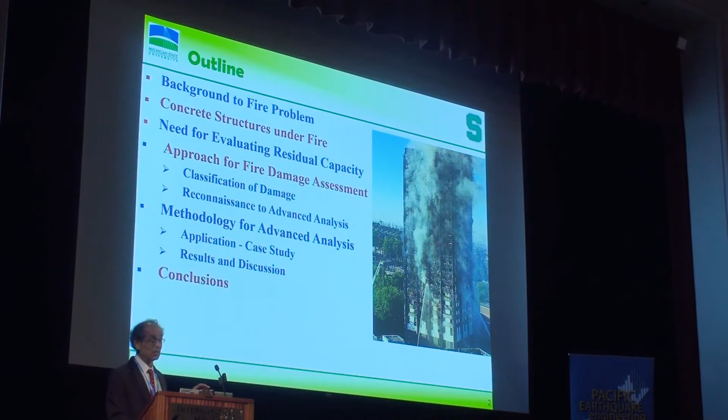And what is the need for evaluating the residual capacity? Then I'll present a classification of damage which can be done through basic reconnaissance, up to advanced analysis, to classify fire-damaged structures, which is very important, and there is a lack of guidelines or standardization for this. Then I'll present a methodology we are developing as part of the PhD work recently and advancing it. And if possible, I want to present a case study, but let's see.

Fire represents a severe hazard and threat to the built environment, as I already said. These fires cause thousands of deaths and billions of dollars of damage every year in every country around the world. If you look at the statistics for the United States, there were more than 1.32 million fires in 2017, ranging from very small to very large, causing 3,400 fire deaths and resulting in $23 billion of losses.

And if you include indirect losses, it adds up to more than $50 billion. In any country around the world, fire damage or fire losses amount to 1 to 2% of the GDP every year. Just to give you some statistics.

Good thing about this also I would like to add, many of the fires don't lead to collapse of structures, collapse of the damage, and even, it is put out very easily. But there are a good number of fires which do cause damage and destruction.

Now, fire is an important hazard. Why? Because fire can start due to an electric short circuit in any one room. There are so many electric outlets, it can start from there. It can start in a kitchen, for example, or somebody throws something, luckily smoking is banned in most public places now. Before that, most of the problem in the United States till the 80s was smoking, a cigar falling on a carpet and starting a fire.

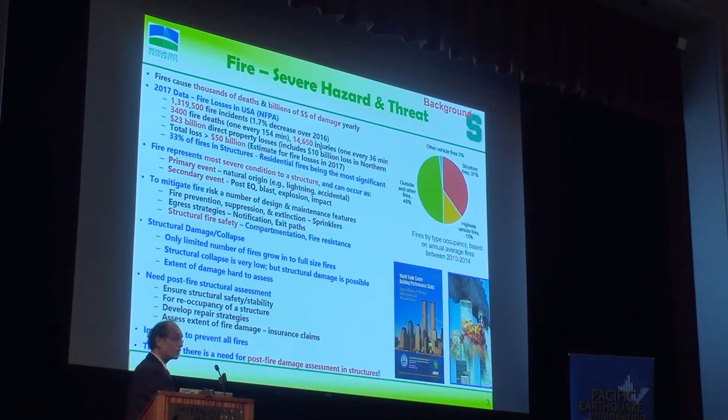So as a secondary event, after an earthquake, after a blast, a truck hits a bridge - you are designing that bridge to resist that impact load, but forget about the fire. Including in 9/11, much of the damage was done by fires, not by the planes hitting the building.

In fact, the conclusion - I was part of the investigation team on September 12th, we were at ground zero - the conclusion of this report which went to Congress was that the towers would have been standing today if there was not that kind of fire, or if there was no severe fires.

Okay, so fire as a secondary event will be the primary cause of damage. Now it can happen even, you might laugh at this, after a flooding - where more than 1,800 homes were burnt down after Hurricane Sandy.

In New Jersey, an electric short circuit in one basement led to damage where each house was $1 million plus or $2 million, affecting 1,800 homes. So you can imagine the damage.

Now, to mitigate this, we put in a lot of measures. One good reason you don't see fire leading into collapse is because of these measures. Fire prevention, we try to prevent by making electric short circuits much safer. Then we put in sprinklers, heat detectors, smoke detectors, exit paths, a number of them. And the last one is called structural fire safety. That means a building has to stand up for 2, 3, or 4 hours in case of a fire, so that the fire can be put out and the building can return to normalcy.

Now, this structural fire safety is based on prescriptive approaches. As mentioned yesterday, most building design is based on codes 100 years old or more, so it's not engineered at all, unlike other events.

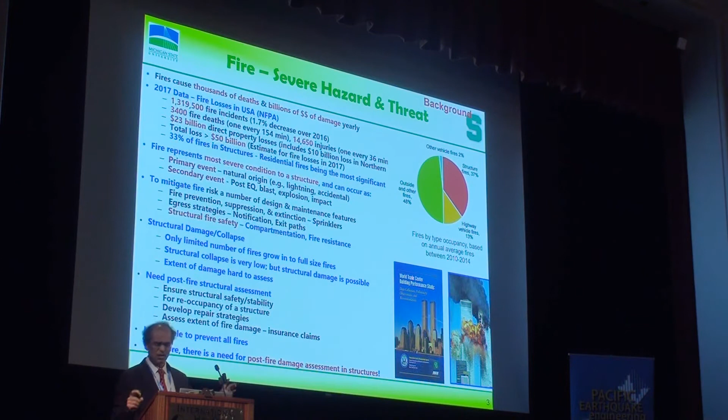Okay, so look at the high-rise fires in buildings. I'm just pointing this out to illustrate the magnitude of the fire problem. Starting from 9/11, where more than 40 buildings suffered damage and destruction. Out of this, about 9 buildings collapsed, 18 buildings suffered damage, and much of it is due to fire. Things have not improved since then, though there are very limited changes in the codes.

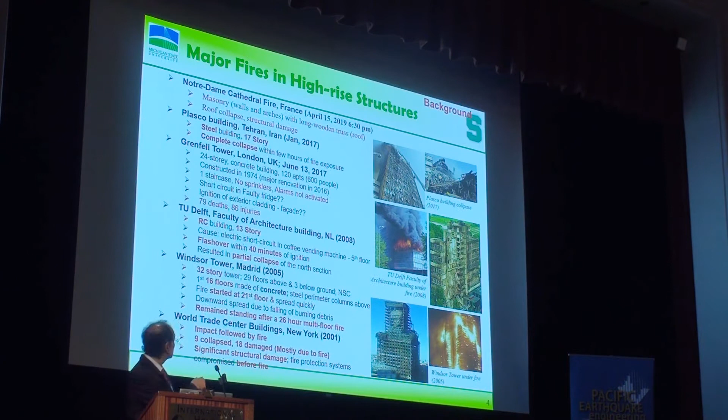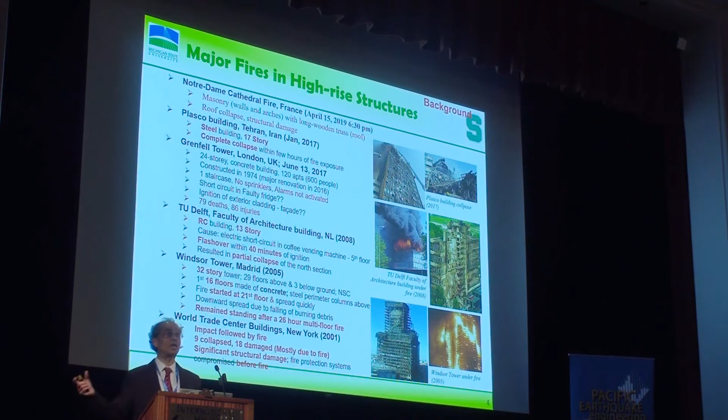TU Delft, for example—I was part of this investigation with the Technical University of Delft Reconnaissance team—a short circuit in a coffee vending machine led into a fire. This 13-story architectural building collapsed. Right after that, one of the biggest problems was whether to get into the building or not, to assess the damage, for a number of days. No techniques, no technologies, right?

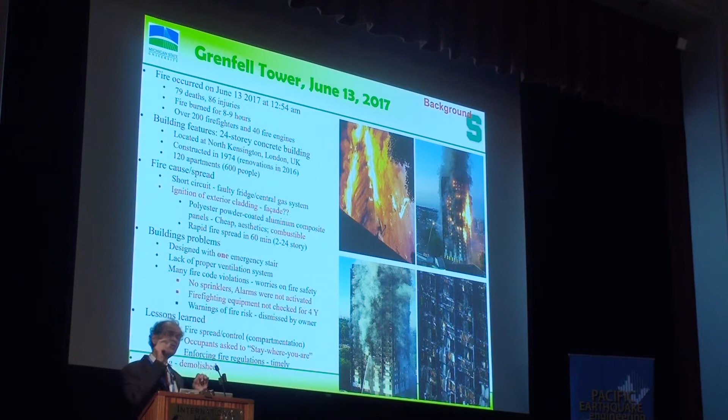So then let me talk about Grenfell Tower. This happened in Paris as well, but for lack of time I will focus on Grenfell Tower. A lack of wiring, or faulty wiring, in a fridge led into a huge fire. And because of the combustible materials of the cladding outside, fire spread very rapidly, never seen that kind of fire before. With this number of people there, fire definitely affects much more the people who are poor, vulnerable, or aged, because they cannot run away fast. In this building there were a lot of refugees and others, I think, and those people had a lack of understanding, including language problems, to get out of the building.

When they were trapped, firefighting happened, but it could not be controlled. The firefighters then withdrew. They couldn't get back into the building after 2 or 3 days, because they never thought the building was safe. And structural engineers couldn't do much to assess the damage. Because of this, it took 3 days even to recover the bodies, or to get into the building in case somebody was there to save them. So this is how it turned out.

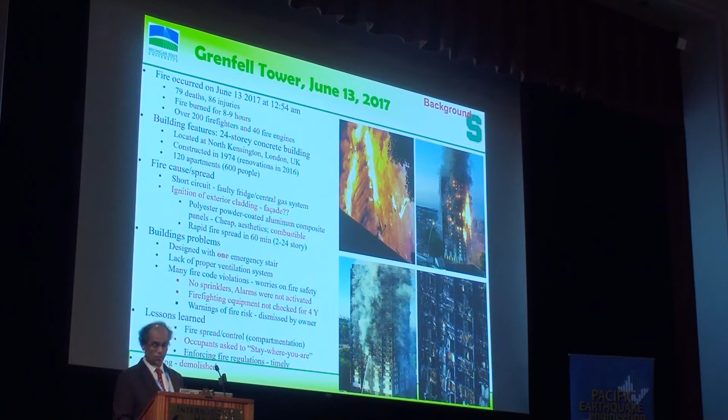Now, it is not buildings alone. In the case of bridges, it's worse, because that's the most critical infrastructure you need. Why? In the case of buildings, we put in a lot of measures to at least get the fire problem under control, like sprinklers and heat detectors. For bridges, you don't do anything—they're not designed for fire at all, no prescriptive approaches even. Today in the US, you don't need any measures for a bridge to be built from the fire perspective, whereas in buildings you need to do that, right?

Building codes are very specific. So when you look at this number, including the MacArthur Maze, you all know it happened right next door here in the Oakland area. In this case, a steel girder bridge collapsed in 17 minutes.

It's a textbook kind of failure. I teach a course and tell my students steel structures can collapse in 20 minutes without any fire protection. Here it happened in 17 minutes because it was an oil fire. I teach building fires.

So in this case, you see what happened, and how much loss to the economy. It took weeks or months to rebuild this bridge. Silicon Valley people were asked not to come to work for the next few months.

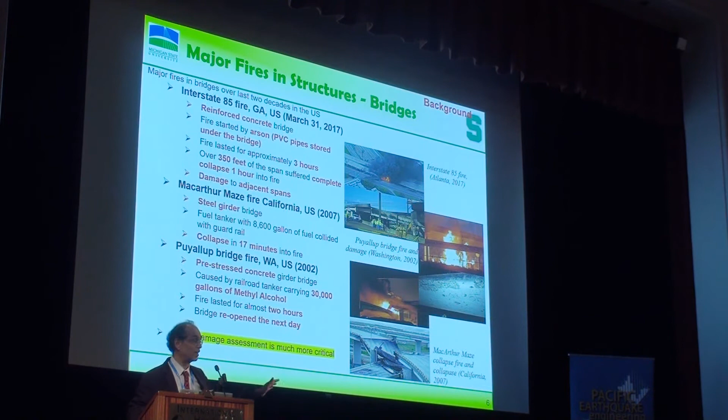Now let me tell you if concrete bridges are better. This is an example that happened outside of, or close to, Atlanta Airport, on I-85. What happened was there was a problem with the drainage.

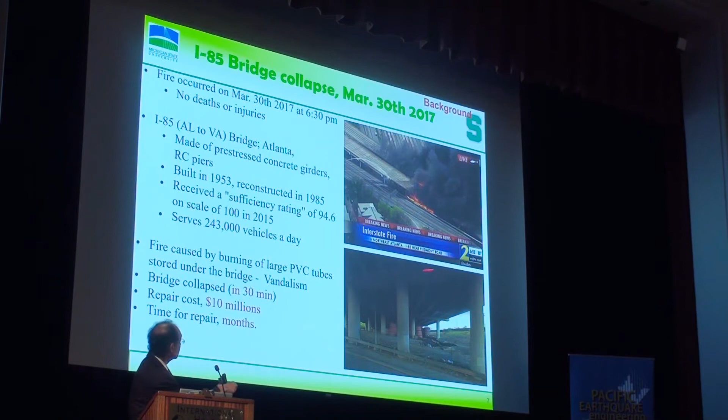So they decided to bring in a lot of pipes, which were basically polyvinyl chloride pipes, so that in the spring they could start the work. On a March evening, when it was very cold, a homeless person comes in—that's at least alleged—and puts a lot of papers and rubble around to start a fire to warm himself up, and it spreads, and he runs away.

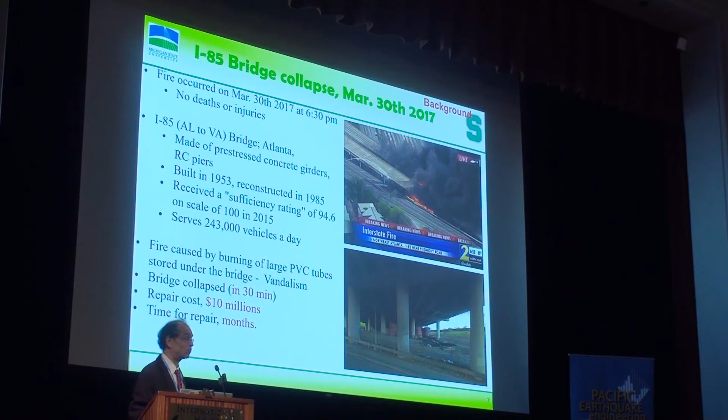Then when the fire department comes in, they start to fight the fire, because it was on a highway close to Atlanta, so they could respond. But what happens right next door? Look, they couldn't fight the fire because of the new kind of materials and new kind of constructions, where we are increasing all these durability characteristics and concrete strengths.

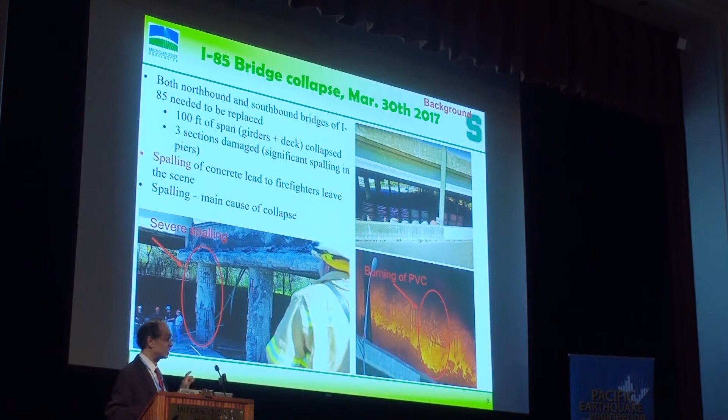Today my students are making 35 KSI, 200 megapascal, even 220 megapascal concrete—it explodes under fire. That's a different topic for some other day.

Steel is not immune either; new types of steel have problems too. Wood is much more of a problem. Any new material you tell me has lower fire resistance than what traditional materials used to have, including masonry.

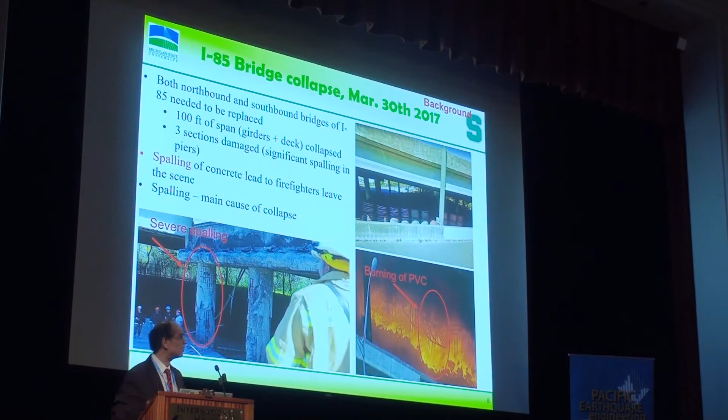So anyway, look at this, what happens. Huge fire, firefighting could not happen, lot of spalling. Can you see that the reinforced concrete is completely exposed?

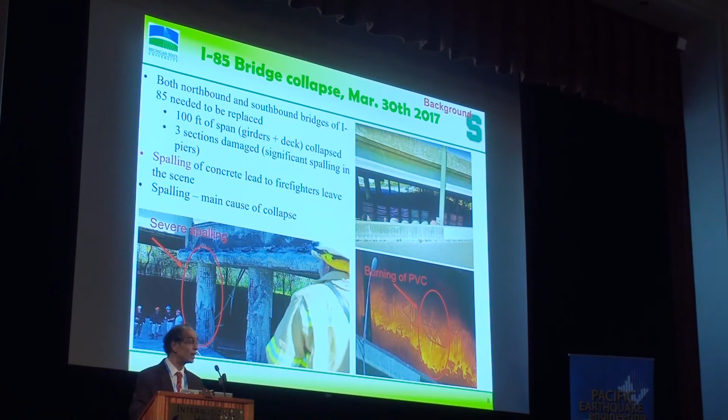The problem was not that multiple spans happened—a few spans collapsed. They didn't know which to replace, which to rebuild, because it takes a lot of work to take the core and test it and so on. So there aren't really many methods for that.

How are we doing right now? So right now, concrete structures typically have excellent fire resistance, and in most cases they recover much of the capacity—much of the residual capacity is there in the concrete structures.

Typically, we don't have to do anything in concrete structures from a fire design standpoint. All we need to do is provide concrete cover to the reinforcement and maintain minimum member dimensions. That's the current code. And with temperature, the strength and stiffness drops.

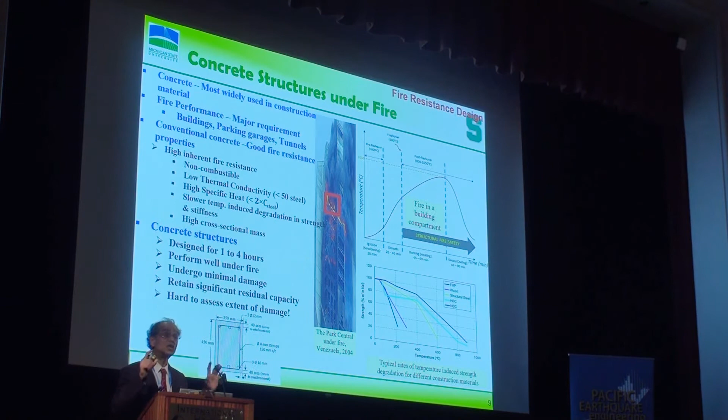This is concrete, that's steel, this is wood. So concrete typically loses strength much slower than other materials. That's the property which gives it much better fire resistance, so our residual capacity is left.

If you look at the 9/11 buildings, this is World Trade Center 7. After 8 hours of intermittent burning, it collapses. It was designed for a 3-hour prescriptive approach.

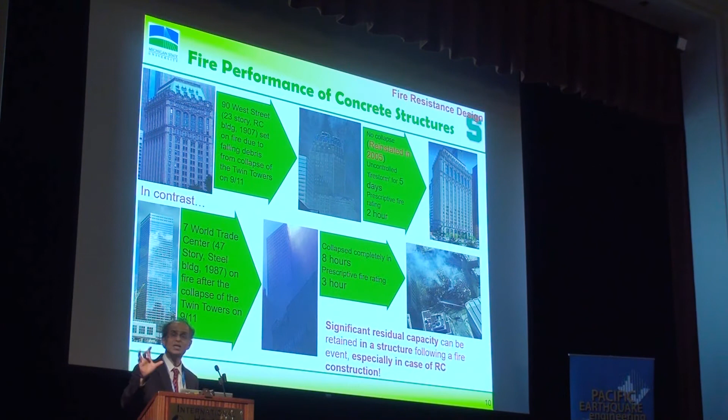Look at the concrete building 90 West Street—it burned for 5 days intermittently, was also designed for 2 hours, but it could be retrofitted. This one collapsed, that one could be retrofitted. So the message is: concrete structures can retain significant amount of capacity.

As I mentioned, it's very important to assess residual capacity after a fire incident, because the first thing is whether you want to send people back into that building, like apartments, because otherwise a building might collapse. It happened in Sweden—there was a parking garage.

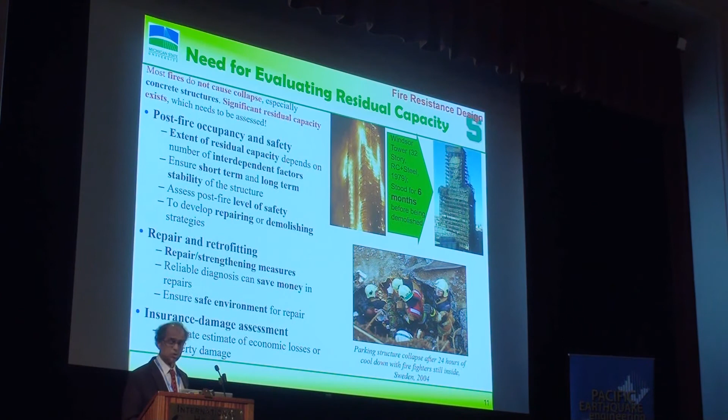After nearly 24 hours, people went back, as firefighters went back to the parking garage, the building collapsed on them. Because the cooling phase in a lot of fires, especially in post-tensioned structures, is much more dangerous than during the fire itself. So now it's not only about what kind of repair and how much capacity has to be restored—you need to do calculations to find the residual capacity, as well as for insurance and damage assessment, from the state agency's or insurance company's point of view. It's very important.

What is the current state of the art?

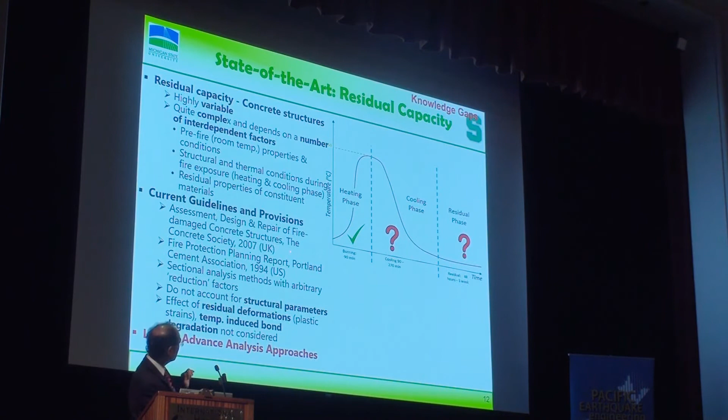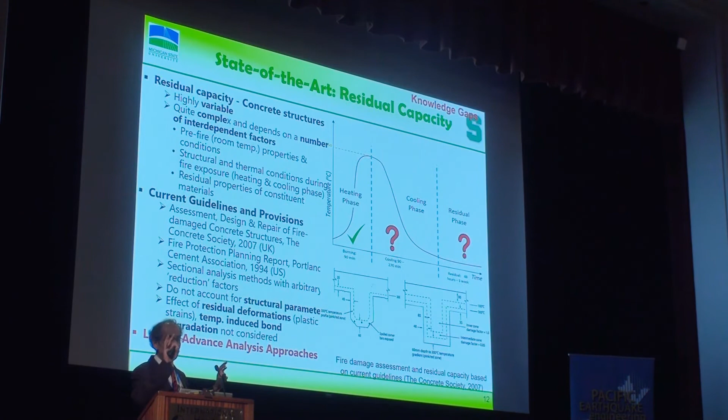Information on this topic is very, very limited. There are some prescriptive guidelines, such as the UK Concrete Society recommendations and some books, but there is very limited information on how to assess damage. American codes don't have any information on this, including the new ACI repair code when it comes to fire damage. So why is it so bad?

Because of the complexity and also the limited research going on in this field. So what happens if there is a building under fire? Take this beam, where there's fire in this compartment - during the heating phase, this is how fire starts and it cools down. The temperatures within that concrete beam or member - this is rebar temperature, this is concrete at mid-depth.

Now look at the structural deformations. A lot of damage is happening in the structure, but it's recovering, and at each minute various properties in the concrete microstructure and steel are changing. That has to be accounted for in the analysis, and finally you end up here after complete cool down of the structure, which takes a day, 2 or 3 days.

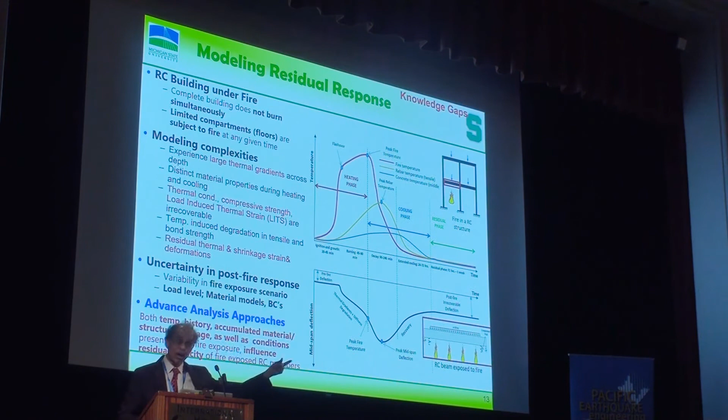Look at this - these are the residual deformations, which have an impact on the residual capacity. There is, as I said, very limited information in the current codes and standards, so we came out with a classification system.

If there is a fire in a building, bridge, anywhere, you can classify the structure - overall structure or structural members - into 5 levels of damage. Class A: very limited or no damage at all, cosmetic damage, just the paint is gone or something. Class B: technical damage, very small cracks and stuff.

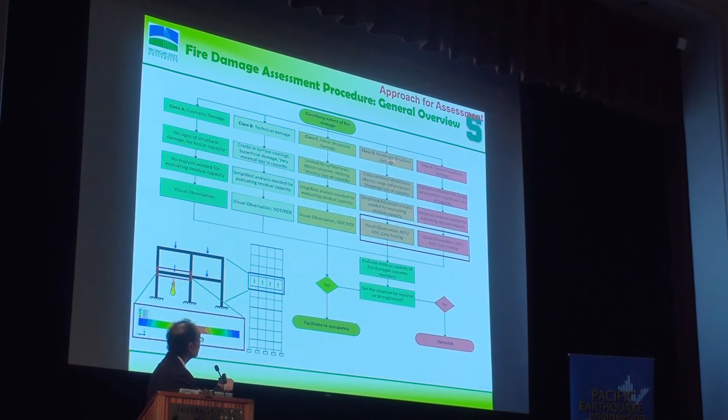Minor structural damage - yes, there may be some loss of capacity. Then some level of capacity loss and significant level of capacity loss. That's class A to class C.

Then we came out here - no analysis needed, just some reconnaissance. Based on the first visit, reconnaissance is needed everywhere. Then you move on to simplified analysis, just to fix those cracks or whatever. Here you can apply simplified analysis with some non-destructive testing. Here, some semi-destructive testing. Here you need advanced analysis together with NDE or NDT methods.

Then you decide whether to facilitate reoccupancy or demolish. In most cases here, there's a chance you may have to demolish, but in these cases you can retrofit very quickly and easily, whether it's a bridge or a building.

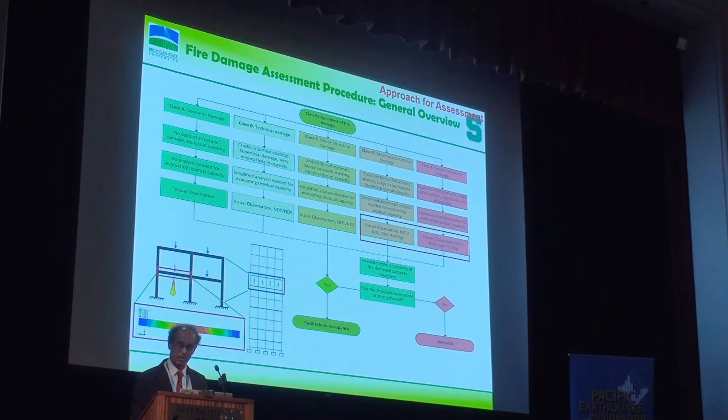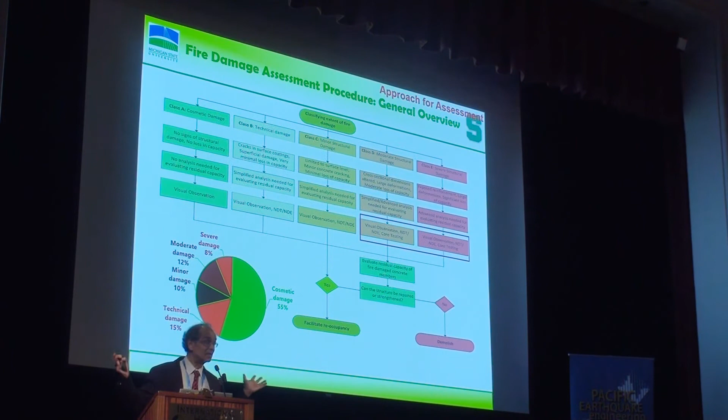As you can see here, in fires, only severe damage happens 8% of the time. But some statistics show that after reconnaissance in over 55% of the cases, you can say there is not much you can do, or there is not much damage to the structure - but you need to look at it carefully.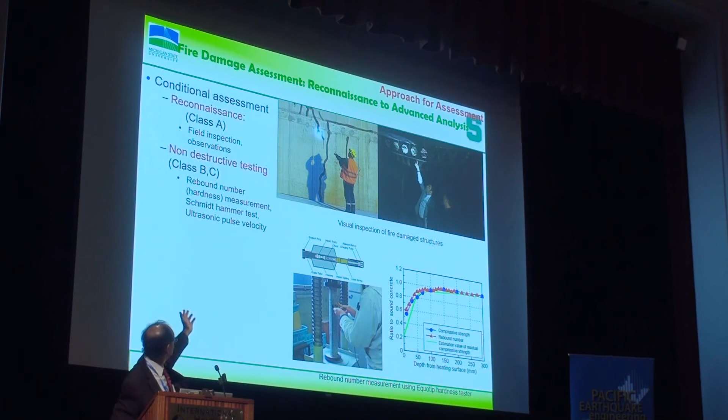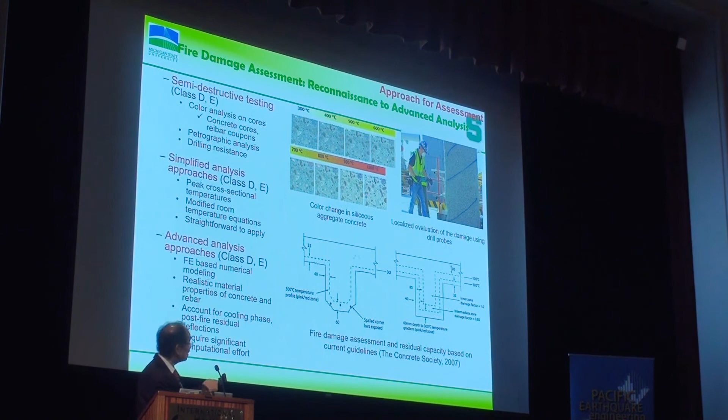Non-destructive testing - you can do this with Schmidt hammer and other kinds of tests. There is some information from semi-destructive testing, and you can apply some empirical approaches such as simplified analysis when the damage is class D. But for class E, you have to carry out advanced analysis.

Now, even in the same building, you can have various classes of damage depending on where you are in the building. Some parts may be class A damage, others class C damage. So this has to be determined from the first reconnaissance, then go deeper into this. Reconnaissance is the most important step.

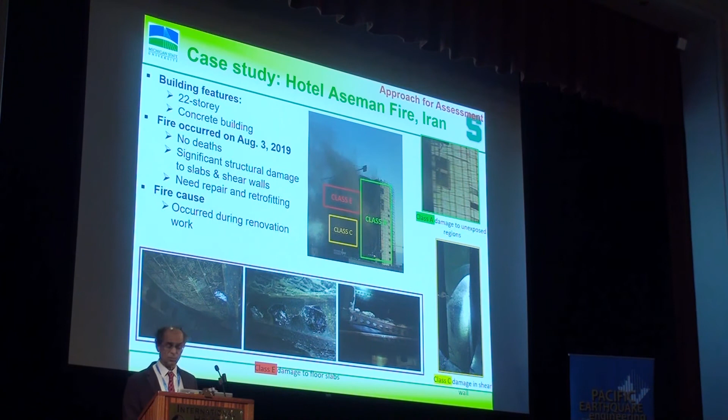Now, for advanced analysis, let me get directly into the approach we developed recently. I'll show you quickly because of lack of time. You need 3 stages of analysis.

You need to know just before the fire what the structure was, because a structure might be designed for overcapacity, which we always do, but what was the condition just before the fire started. Then the second stage of the analysis is during the fire - what happens.

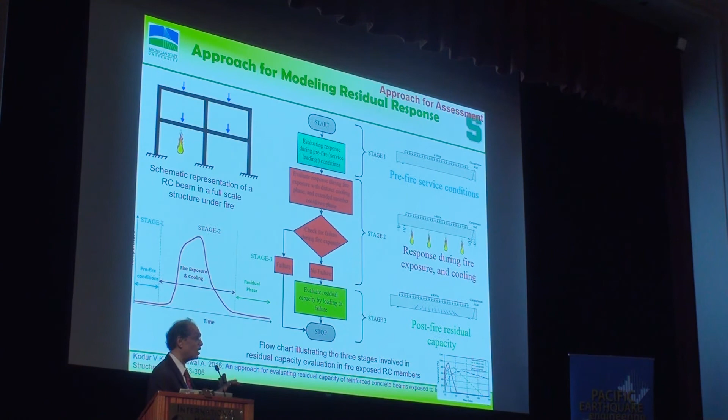Especially the complication is during the fire heating phase and cooling phase, where the properties, your boundary conditions, everything are changing with time - boundary conditions especially are very important. And the third stage is just after the fire, after 2 or 3 days, what's the capacity. So 3 stages, which in the literature nobody talks about.

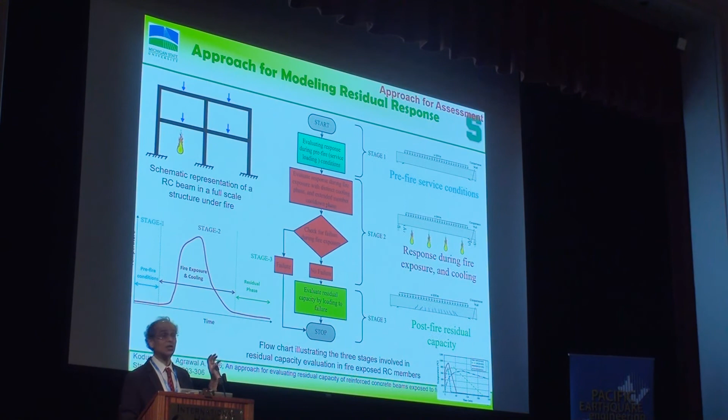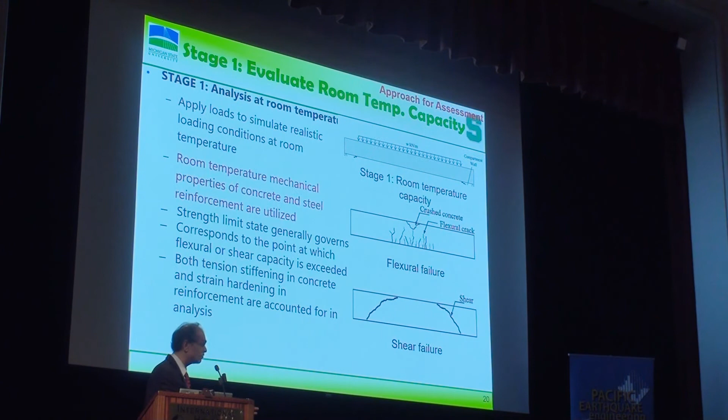So this is a new approach we developed, and the problem is at each stage of the analysis, the material properties are different, boundary conditions are different, failure limit states are different, remember. So that has to be given due consideration.

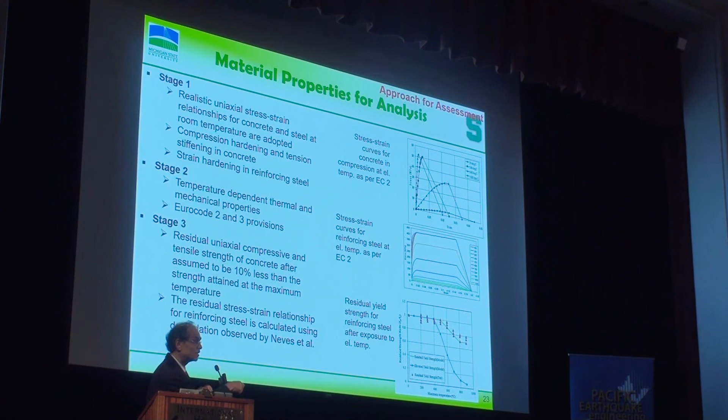Once you do this, for concrete, look at this: during elevated temperature, in the heating phase, the stress strain curve is decreasing like this. For steel, it's decreasing at 800 degrees here, 20 degrees here, but steel recovers much of its strength, whereas concrete doesn't, during the cooling phase. This is the yield strength or compressive strength. Concrete doesn't recover during the cooling phase, but steel recovers much of it. So all this is very complicated from that point of view.

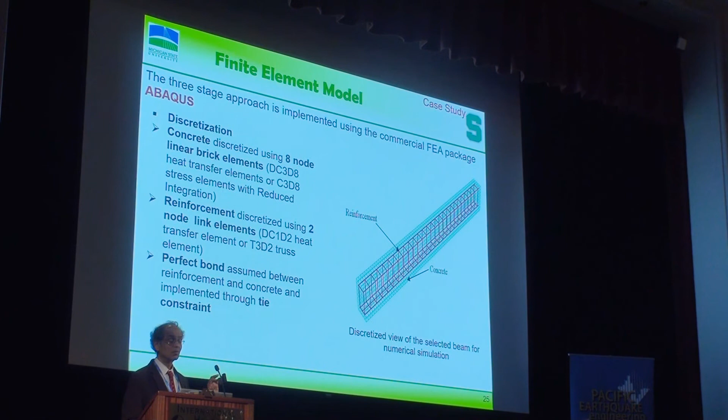You can apply finite element models, which I'm not going to go into. I'm going to show you a simple case study kind of stuff.

So this is a beam. A fire happens in a tall building. There are two beams, one in one compartment, another in another compartment. Based on the firefighter reports, based on the reconnaissance, we know that there is damage to the beam, class C or class D. So this is the first fire. I can create the fire in the room if you tell me what the contents of the room are, whether it's an office room or a hospital room.

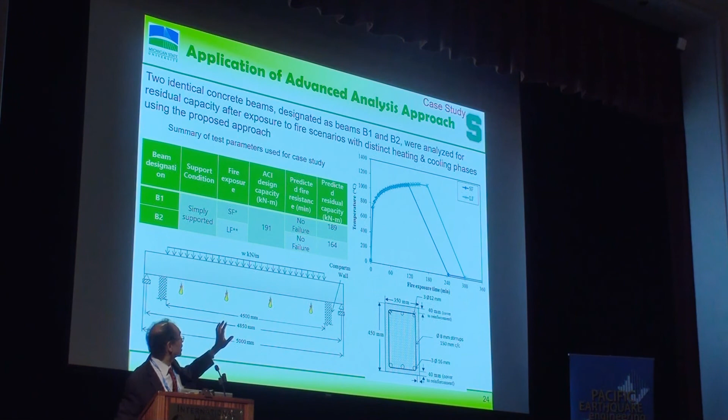This is a long fire. In another compartment, there is a lot of books and stuff, so that's where you have significant fire, a longer fire. So if it is, then I do the analysis, first step, second step and third step. Let me go to the second step.

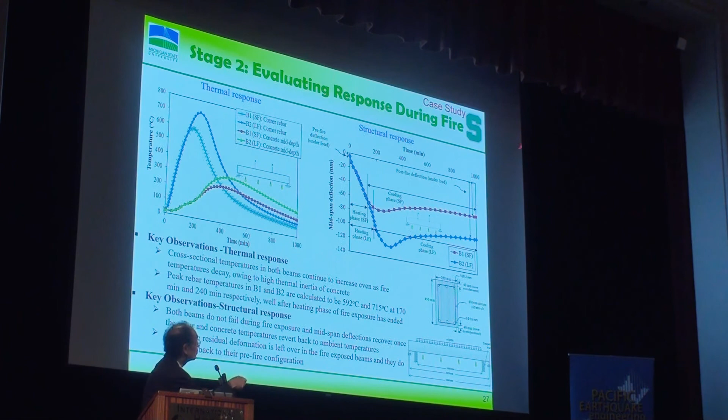So this is the capacity left, this is the residual deflection. You need to impose these deflections to evaluate the moment capacity of the beam. So this is under the long fire, this is under the short fire.

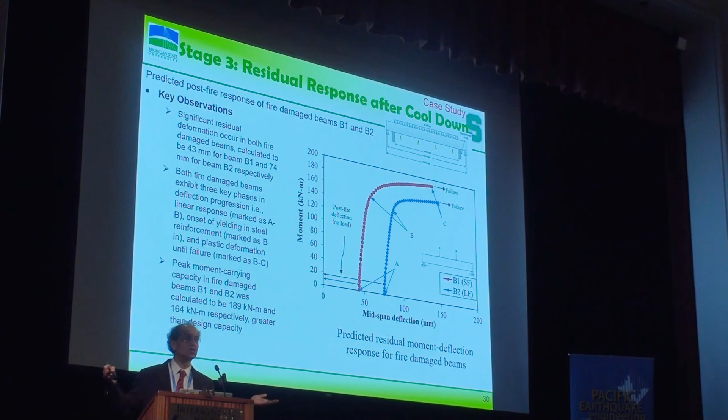If you do a series of calculations, it's possible to apply this if there is a bridge under fire. Typically, in the design office, you can do this if you know all the properties of the bridge, and all the relations and variations in material properties and others. So a number of factors affect this, and it has to be given due consideration, including, as I said, different fire scenarios.

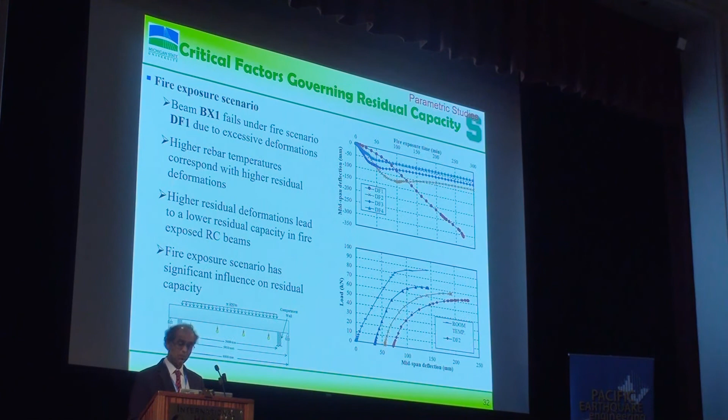Some scenarios lead to collapse of the beam or failure of the beam, whereas others lead to recovery. And the residual deformations or fire-induced damage in the material itself has an influence on the residual capacity. Also, what the load level is during the fire on the beam will influence its response.

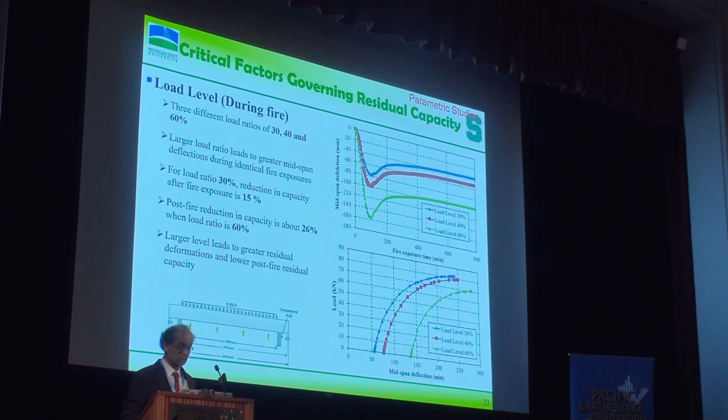But you need three stages of the analysis, not just checking one point. A lot of times when you take a core from one part, based on individual intuitions, it may not reflect the overall condition. It's better to look at the global level than at the local level to assess the damage. That's why, from reconnaissance to advanced analysis, it's very important to apply this.

To summarize: reinforced concrete structures specifically retain much of their capacity in most cases, but you need to apply a range of techniques depending on what kind of structure you have to assess the damage, and that requires from simple reconnaissance to advanced analysis. We proposed a 3-stage approach for evaluating the residual capacity of concrete structures.

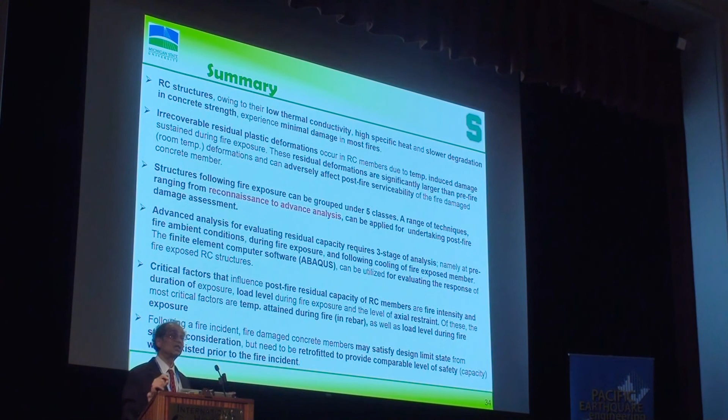Following a fire, damaged concrete structures may satisfy the design limit state from strength consideration, but need to provide comparable levels of safety, meaning you need to retrofit, and this kind of analysis is needed for that.